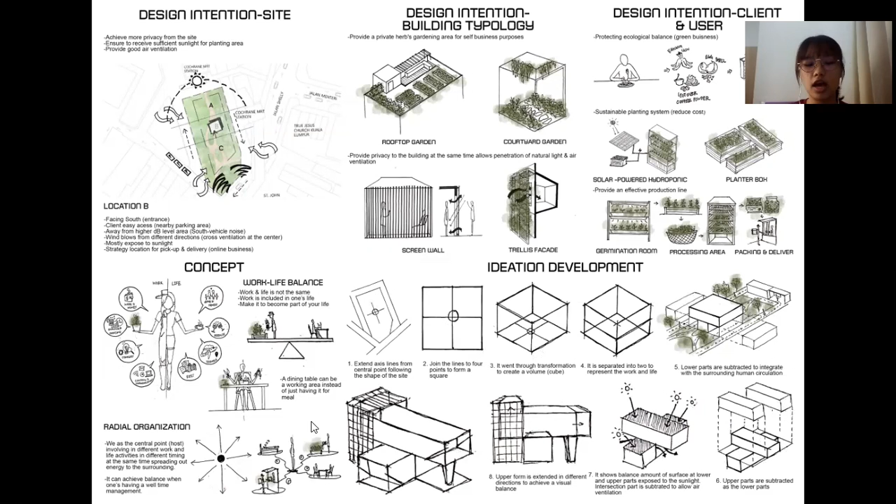Finally, the upper part is extended in different directions to achieve a visual balance. This is the outcome of the whole ideation development.

Moving on is the anthropometric study of this dwelling. First will be the simple living area with a knowledge corner, with a preserved dry herbs wall and bookcase instead of a TV console.

Next is a germination room equipped with a steel rack and grow light system for the seedling process, followed by the processing area equipped with a packaging bench and herb drying rack.

Next will be a simple dining area and large kitchen equipped with a kitchen island for the purpose of broadcasting or video filming for business purposes regarding the use of herbs in either cooking or eating.

Next is the toilet and laundry with a skylight for the penetration of natural light. Moving on is the courtyard gardens as well as the fish pond to regulate the temperature of the dwelling.

Next will be bedroom 2 and 3, which are the same in size, sharing the toilet and bathroom. Moving on is the master bedroom with a private chilling space where they can enjoy the TV program by sitting on a beanbag sofa.

Next is the master bathroom, staircase 1 and 2. Lastly will be the roof gardens, which is triplet from the area listed here.

Below is the space criteria matrix that I've analyzed from the anthropometric study.

Most of the spaces in the ground floor are adjacent to the courtyard garden as it acts as a dominant space in this dwelling. The total spaces of this dwelling is around 103.1 square meters, excluding the courtyard garden, rooftop gardens, and fish pond.

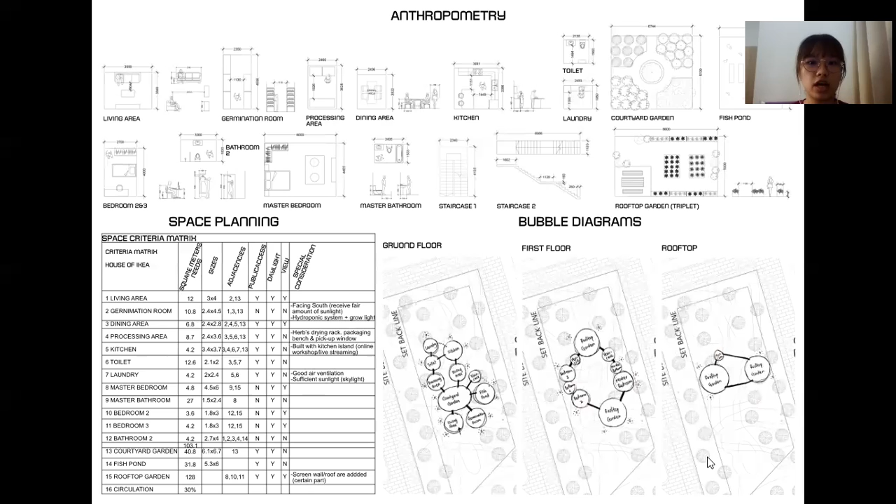This is the site plan showing how the dwelling is integrated with the surrounding. Basically, there will be a pathway leading clients to the direction of the dwelling's entrance.

Some of the trees are preserved to block and beautify the negative views from the site. Following is the ground floor plan.

First, you are entering the living area with the germination room next to it, followed by the courtyard garden, which can be accessed from here, and leading us to the processing area and also the dining area.

The effective production line is shown here as the client will first buy the seeds and germinate them in the germination room. After that, transfer it into the courtyard gardens, then harvest it and process it at the processing area.

Moving on is the large kitchen with kitchen island, toilets, laundry, and semi-outdoor decking, which is used to put the compost bin as the client can easily recycle the leftover food from the kitchen.

There's also a large fish pond located at the right side of the dwelling to balance back with the courtyard garden and help regulate the temperature.

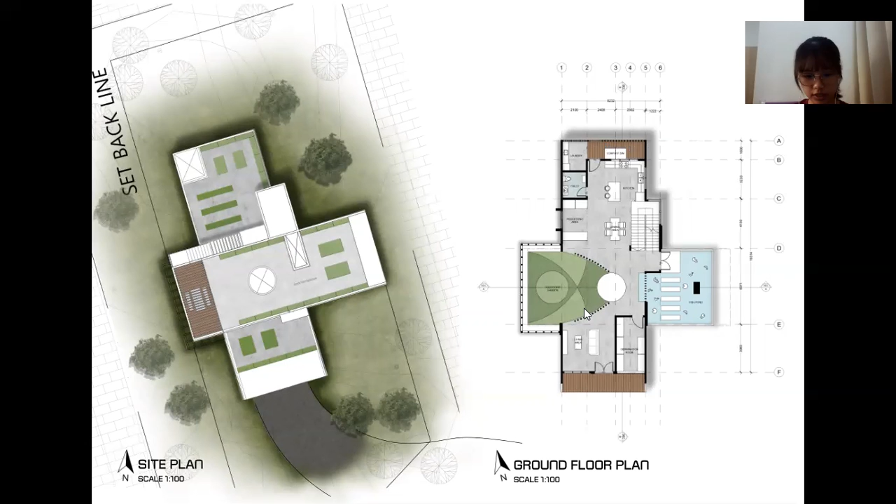You will then access the first floor by using the staircase. The private spaces are located at the left and right sides of the dwelling.

And you can access the roof garden from these two entrance dimensions. There's an outdoor staircase attached with the wall leading to the rooftop.

Before experiencing the exposed rooftop garden, you will first reach a shaded decking area, which is here, equipped with tables and chairs. The shading...

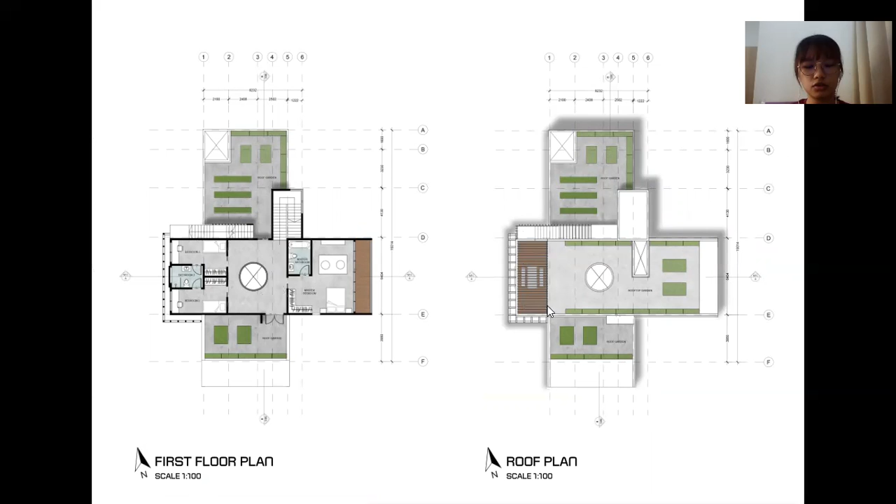The shading device at this area is also used to put the solar panel for the hydroponic system.

Next is the elevation of this dwelling. The most special part of this dwelling is that it has a large aluminum trellis facade starting from the ground to the rooftop.

It's attached with wire mesh acting as one of the planting systems, most suitable for climbing plants. Outsiders couldn't access from this area, so it helps ensure privacy while providing good air ventilation.

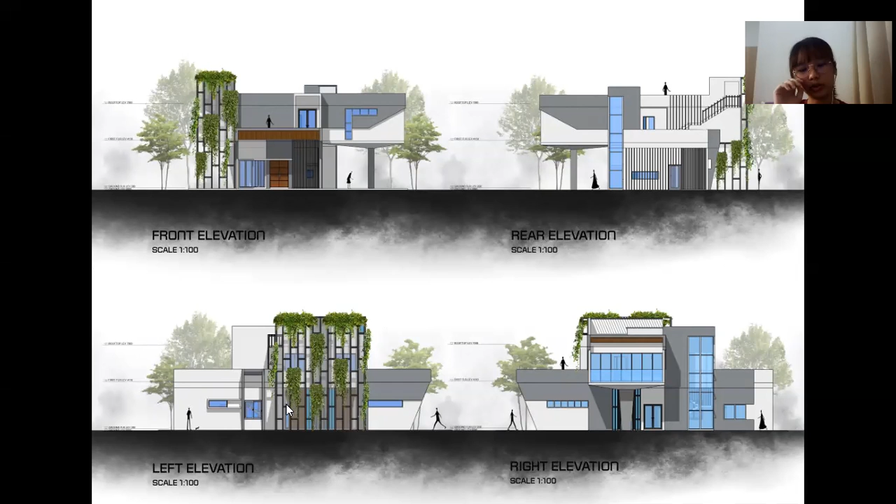Here will be the pickup window that I mentioned previously with a cover above, so people can still get their parcel during rainy weather.

Moving on will be the sections of this dwelling. I decided to use planter boxes instead of a permanent planting system, so the client can easily change the orientation and move them anywhere in the garden.

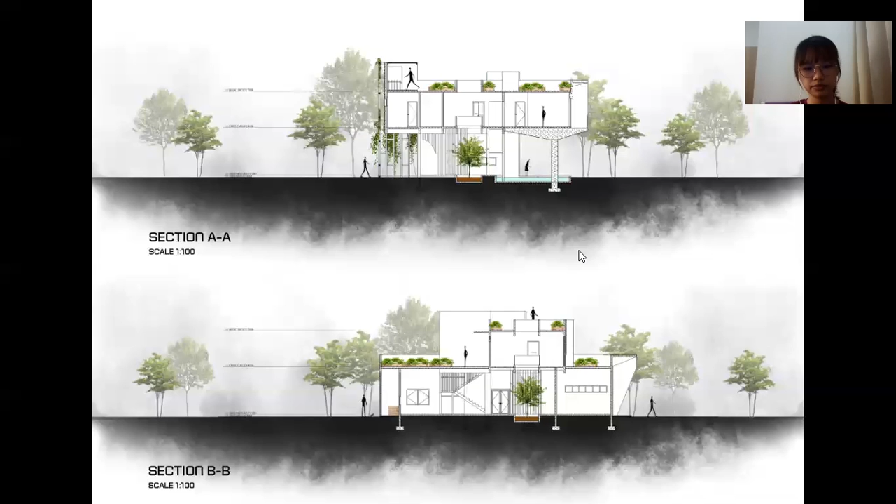This will be the exploded axonometry, showing the structure and materials used in the dwelling.

It's mainly built using concrete structure and brick wall as well as glass curtain walls.

One of the special parts of this dwelling is that it uses reinforced concrete shear walls at certain parts to create a diagonal cut facade, which is shown here.

Besides is the isometric drawings showing the relationship of spaces in the dwelling.

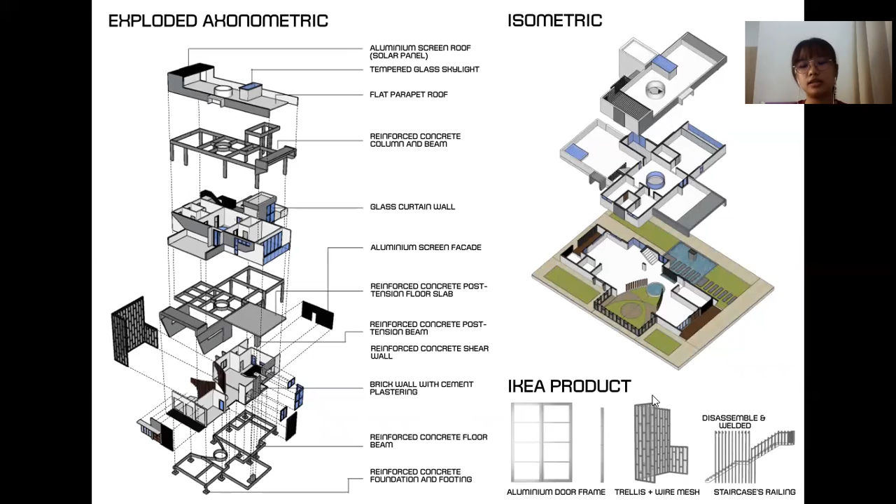The IKEA product that I have applied in this dwelling is the aluminum door frame, which I disassembled and welded to become a trellis and also the staircase railing.

Here are some perspective views showing the uniqueness of this dwelling, and below is the sectional perspective of this dwelling. I've combined all the slides and they become...

I combined all the slides and came up with this presentation board of the Horizon House.

So before I end my presentation, I would like to share a short video clip to bring you all the experience of this Horizon House.